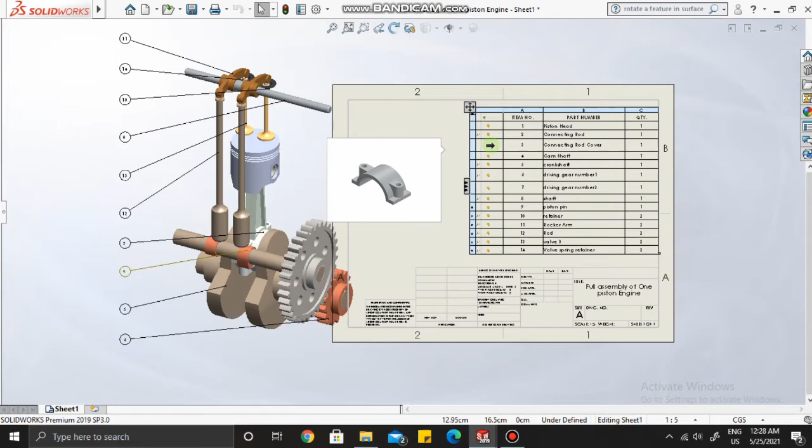So today we are going to create the fourth part of this assembly, that is the camshaft. Go to file, click new, select part and then click OK. Set the unit in centimeters. I'm gonna select the right plane and click on sketch.

Now the first thing we are gonna do is make the main shaft. For that I'm gonna make a circle first, and using smart dimension, I'll give the diameter as 2 centimeters.

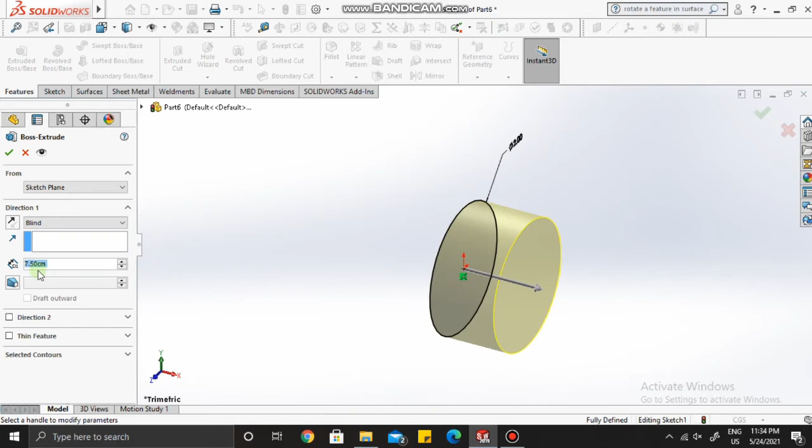Alright, now go to features, click on extruded boss. Here in direction 1 I'll give it 7.5 and reverse the direction from here. In direction 2 I'll give it 12.5 centimeters.

Now go to the right plane and click on sketch. I will make it normal.

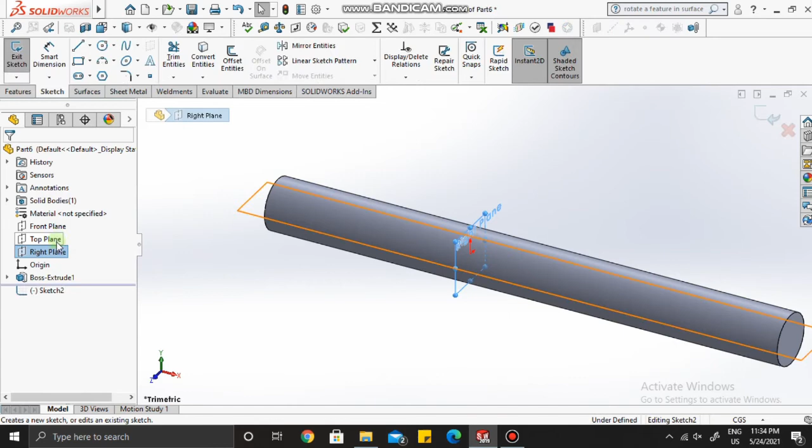Now what we are going to make is the cam. So for that I'm going to sketch a circle again, and one more small circle at this point. Now from the arcs, select 3-point arc, and we'll connect these both circles like this.

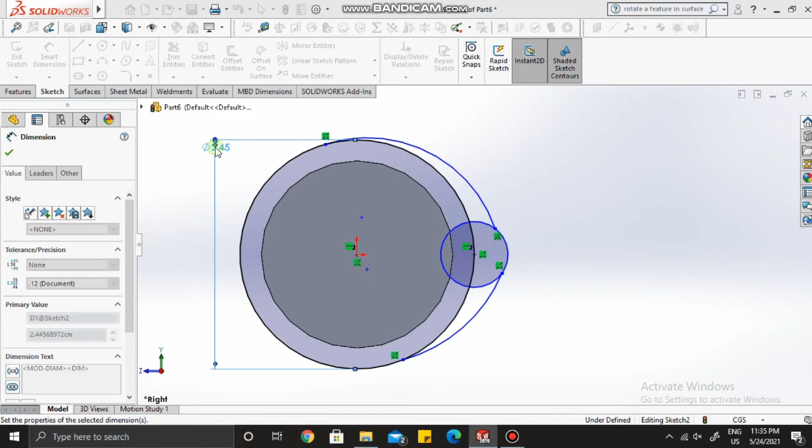Now using smart dimension, I'll set the dimensions. This will be 2.4. The small circle which we made will be 1 centimeter in diameter, and the radius of this circle will be 1.6. I mean the arc - the radius of that arc is 1.6, and this arc will be 4 centimeters.

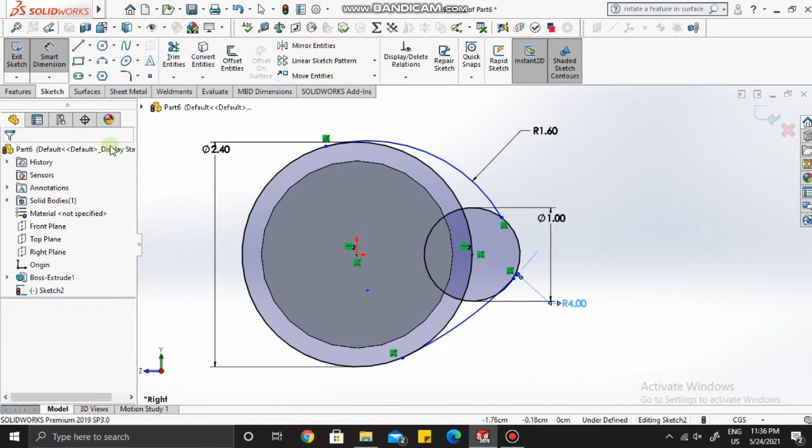Now using trim entities, we are going to trim all extra lines. So select trim to closest and trim all these lines.

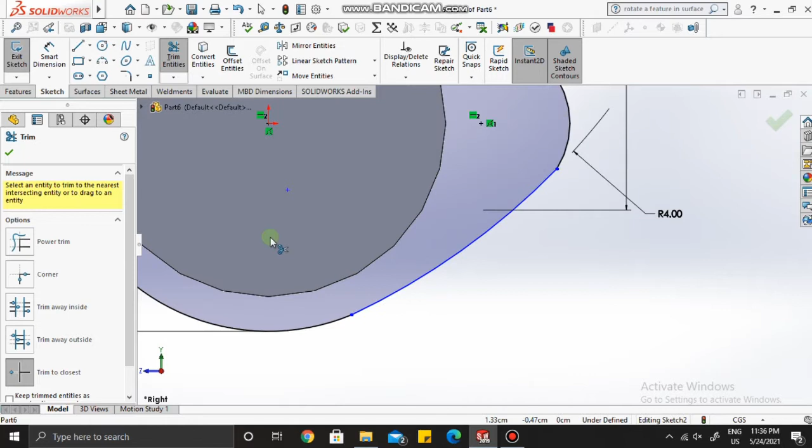Now we'll add a relation that these two arcs are tangent. Actually we want all these arcs to be tangent to each other, so we'll add relation for every arc combination from here. The final one, this arc and this arc, will be tangent. Now we've got our sketch fully defined.

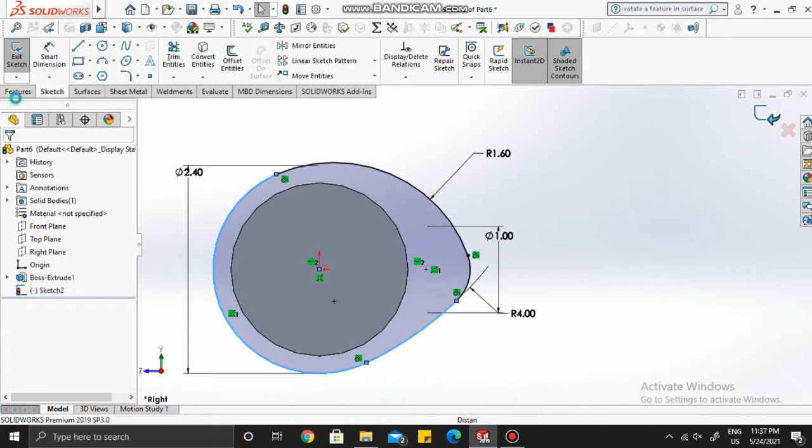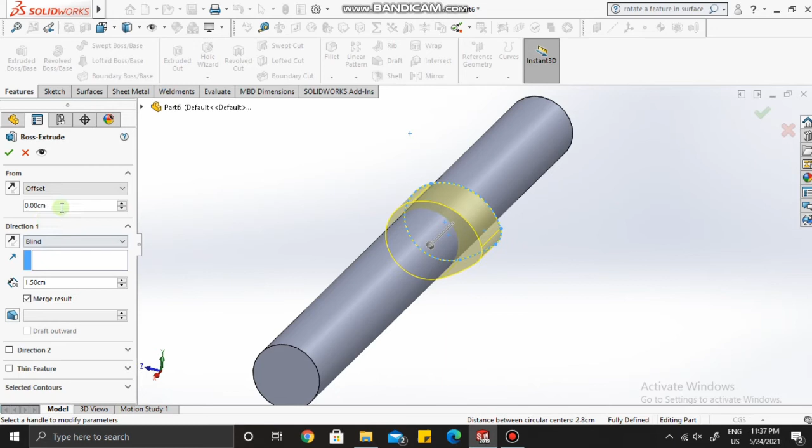Now go to features, click on extruded boss, and from here I'll keep the width of the cam to be 1.5. For direction 1, from here I will select offset and give the offset dimension as 1.5 again, so that my cam is created at an offset of 1.5.

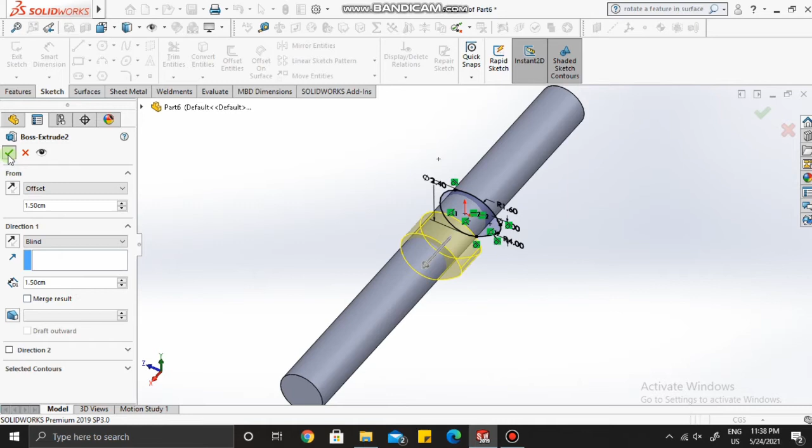Alright, now we want one more cam. Before that I'll edit this feature. Please deselect this merge result. So go to mirror, and mirror face or plane. I'll select the right plane, and the feature we are gonna mirror. Now it's showing an error just because I haven't selected geometry pattern - click on all bodies.

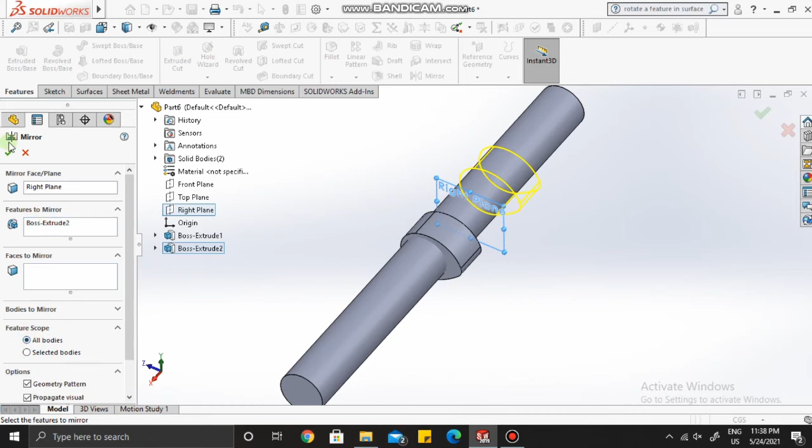Now I'll show you what we have created from the right plane view. Both the cams we have created are pointing in the same direction. Actually, we want one of the cams to be at a different angle so that both valves will not open at the same time - we want both valve timings to be different. So for that,

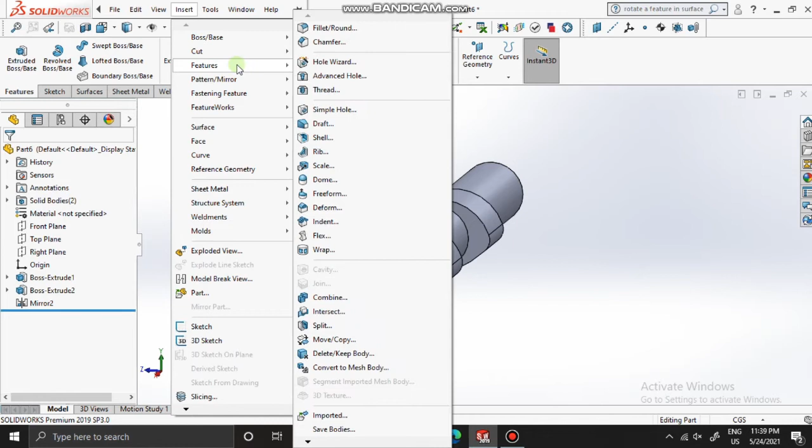go to features, click on insert. From insert go to features, and from here click on move or copy. Now we'll select one of the bodies - I selected this cam - and here we are gonna rotate it.

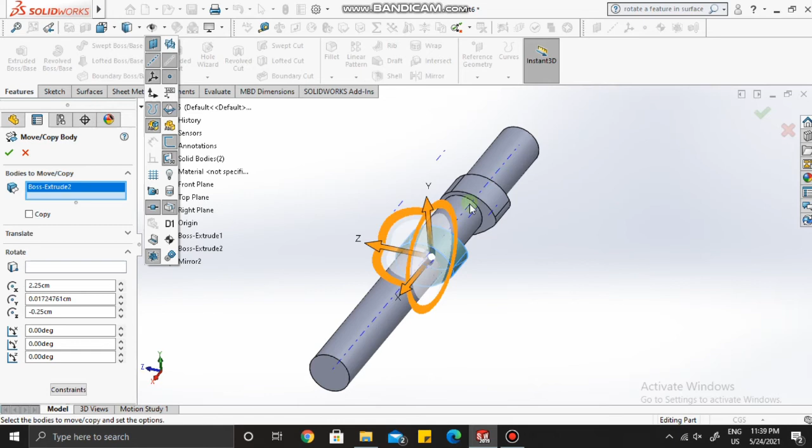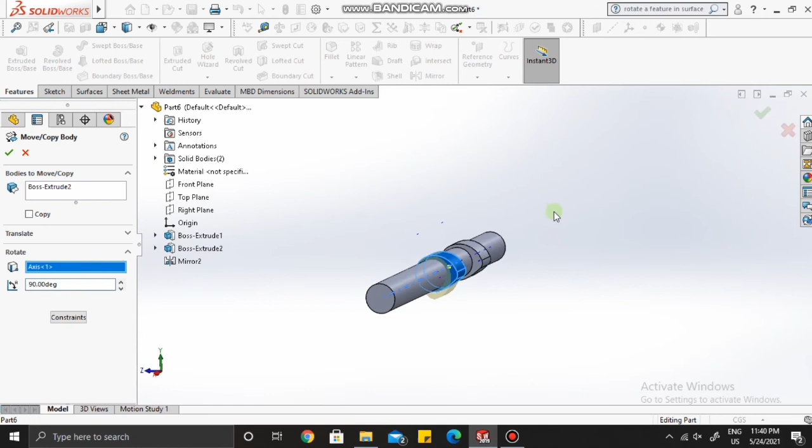For rotating it, we want a temporary axis. So I'll create a temporary axis by clicking here, view temporary axis. Now you can see the temporary axes are created, so I'm gonna select this axis here. Click on rotate, select this axis, and give the degree as 90. Click OK.

Now I'll show you the view from the right side. See, one of our cams is rotated at an angle of 90 degrees. Alright, we are done with that part.

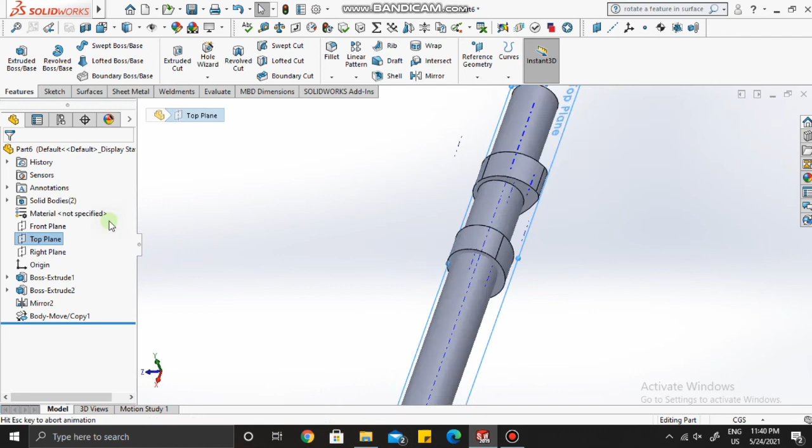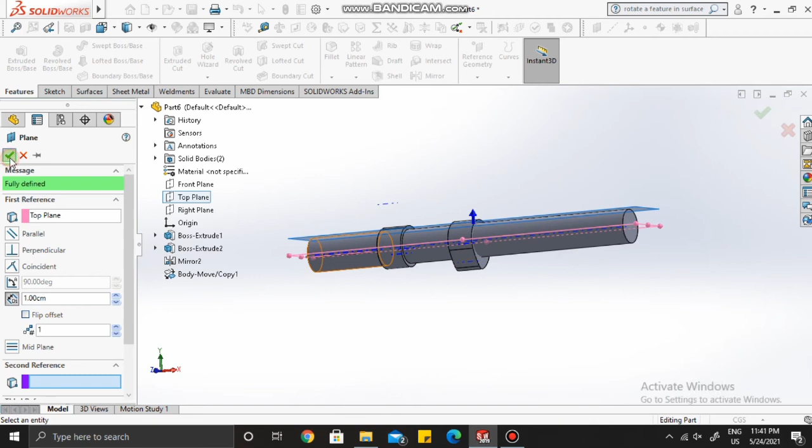Now go to top plane, make it normal. Now I want one more plane. For that I'm gonna click on plane from reference geometry, and in first reference click on top plane, and I want it at a distance of 1 centimeter. Now click on that plane which you have created just now and click on sketch.

I'll make the sketch normal. Now we want a slot here, so for that click on slots, straight slot. Okay, so now just make the slot here.

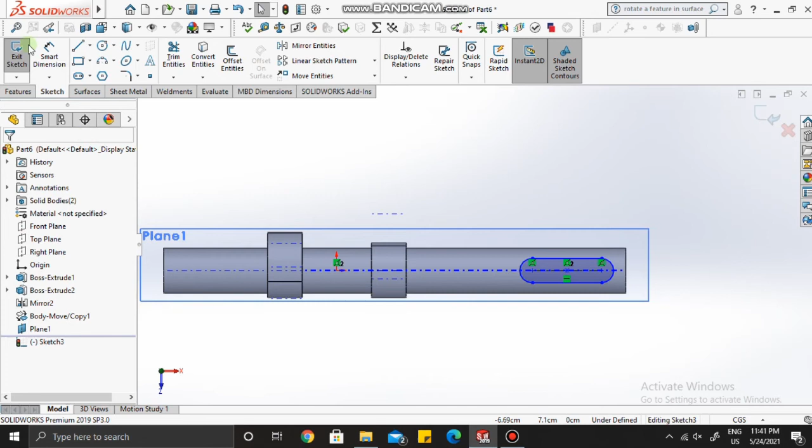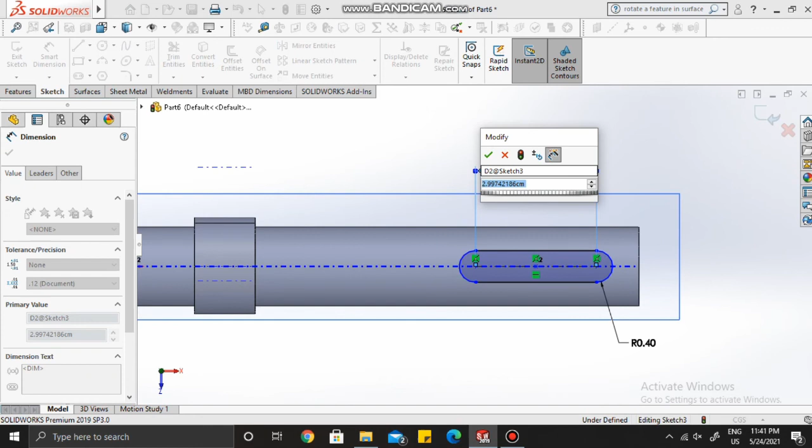Alright, now using smart dimension we'll give the dimensions - this radius is 0.40, and the distance between these 2 points of the slot will be 2 centimeters. Now, the distance from this point to this will be 0.80.

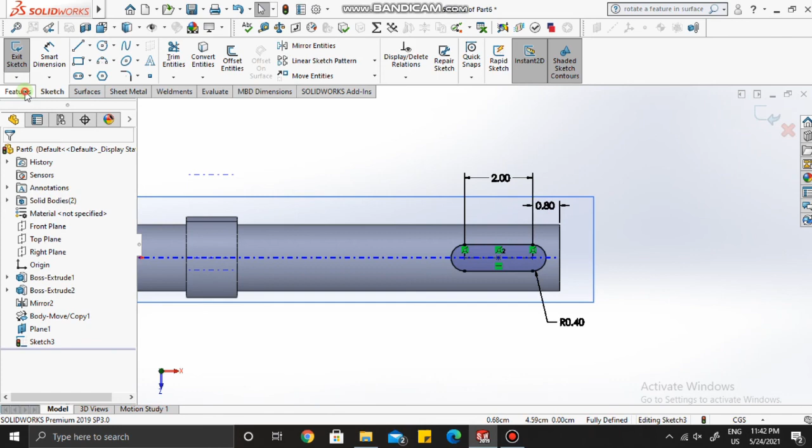Okay, we got the slot ready. Now go to features, click on extruded cut. We are gonna cut this slot, and here we'll give the depth as 0.40. Alright, so our camshaft is ready.